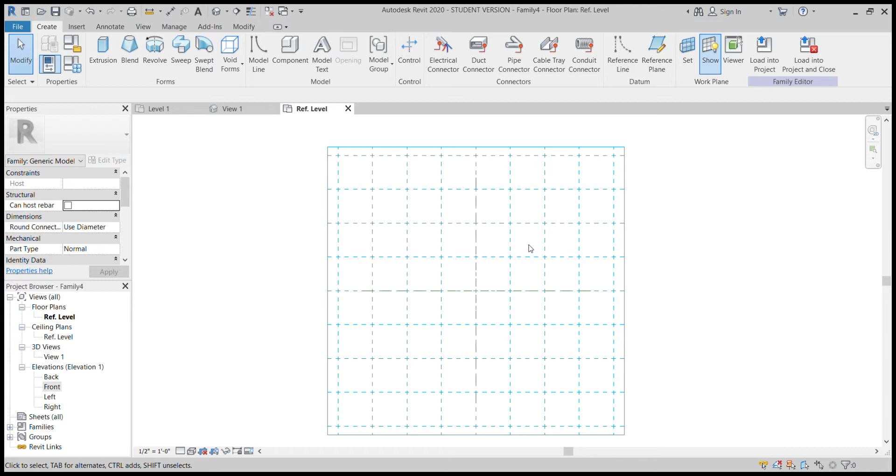Starting off, we're in our family edit mode and we have our reference plane that we're looking at. We then select the swept blend, and just like with the sweep - if you haven't watched the video for the sweep and for the blend, you might want to go check those out first - it gives us the option to sketch our path. So we'll start with that.

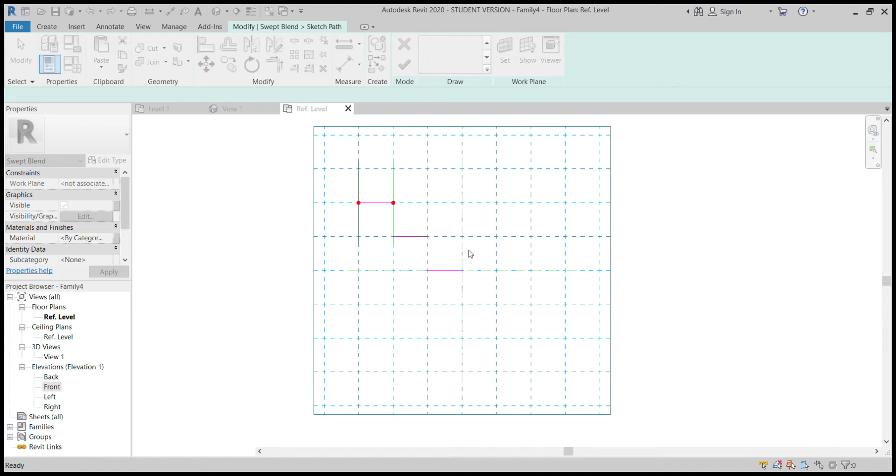And this one, we can't do the stairs that we did before. If we try, it yells at us saying that there's more than one curve and that's not allowed. So we quit that idea, and what we're going to do is a sketch, but we can use this spline tool to create a curving sweeping motion.

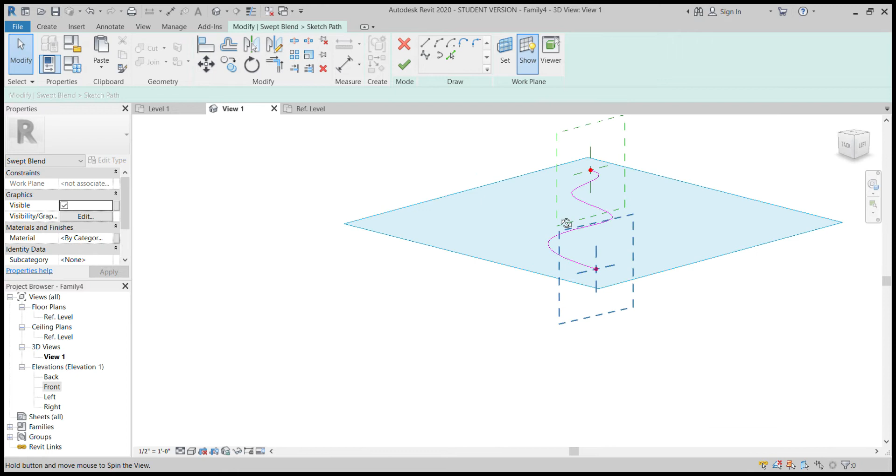The reason why is that when we click OK, looking at it, if we go to our 3D view, you see that we have our two planes rather than just one. That's because our top and our bottom are going to go at each one of them, and it can't have it where it goes straight and then has this extra line. It needs to be able to be smooth, so one end has each.

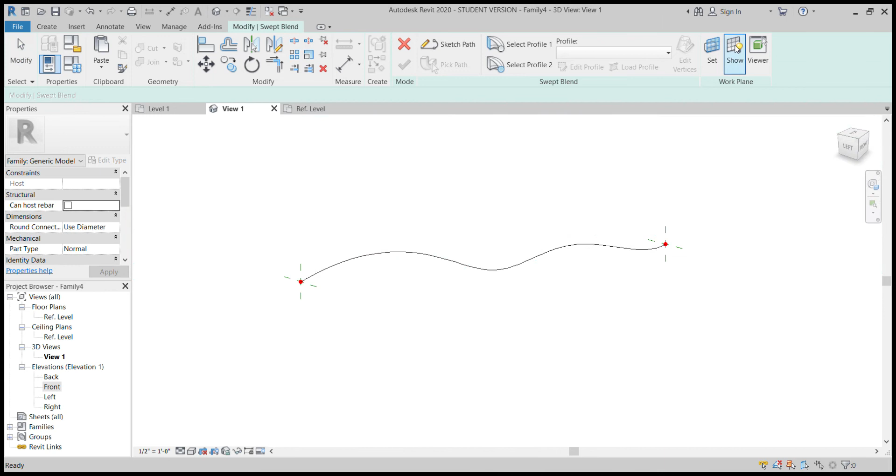So with this, we then OK it, and we can look at it and say, okay, so we have these two sides with this line that's going to follow. So let's select Profile 1, and we want to show our reference point. So we select Profile 1, and we're going to edit the profile.

And we see this is Profile 1, this is the side. So we square ourselves off with this, and we'll just use the same thing we did before, where we'll take a circle, and we'll go about 7 inches out, and we'll just say OK with that one.

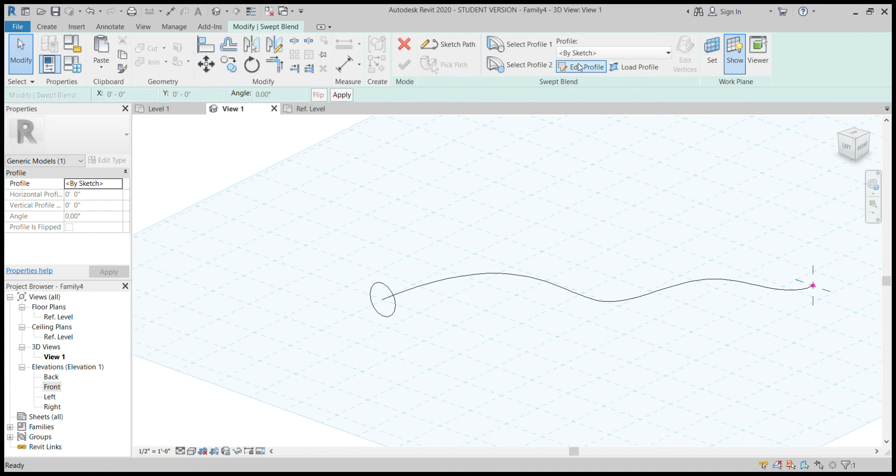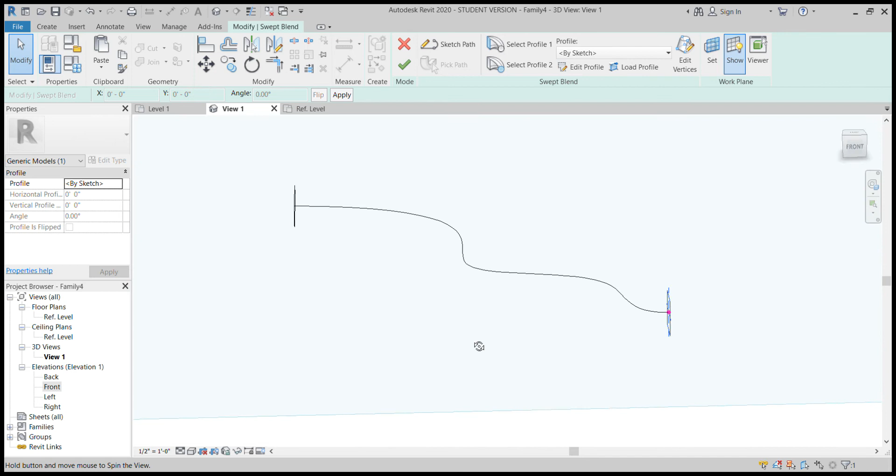So then we want to select Profile 2, and let's pick to edit the profile, which now we're on this side. So we turn around, find the side, square off with it, and this time let's use a square. Let's just go on the one that seems about squared off completely, and then we'll hit edit. So when we look at this, we see, okay, we have a square on that end, a circle on this end, and it's going to follow this path, to which we then click OK.

And we can now see, and let's hide our plane, so we see our circle that transitions into the square on this end. And once again, if we double click on it, you can come over and you can click Edit Vertices, and we can change it.

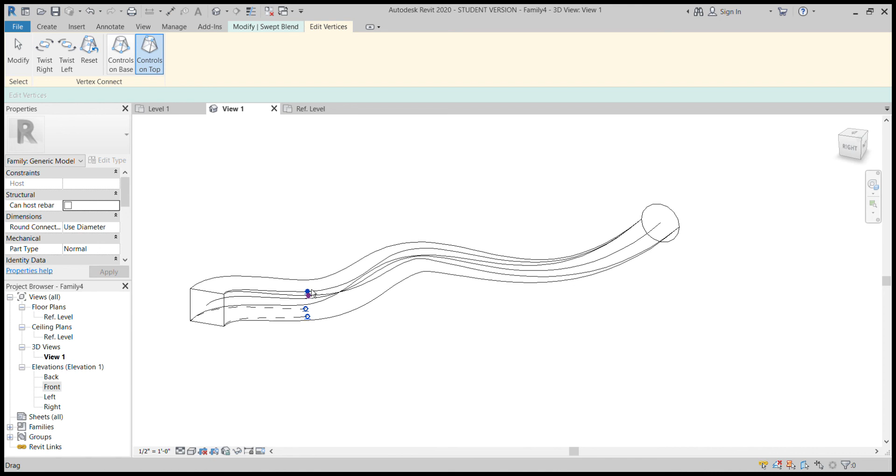We can make them twist in different ways so that we have a slightly more subtle twist where only one side of each is going. And so you can see that you can get quite complicated with it. You can make it very intricate, and it can be kind of fun.

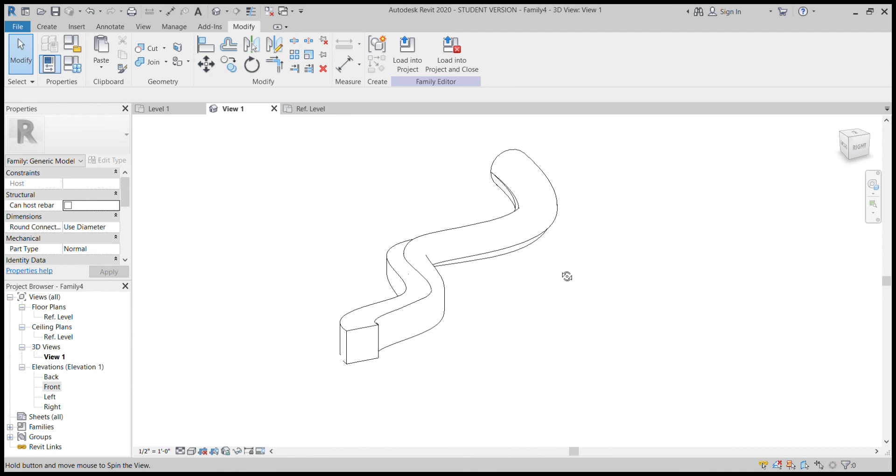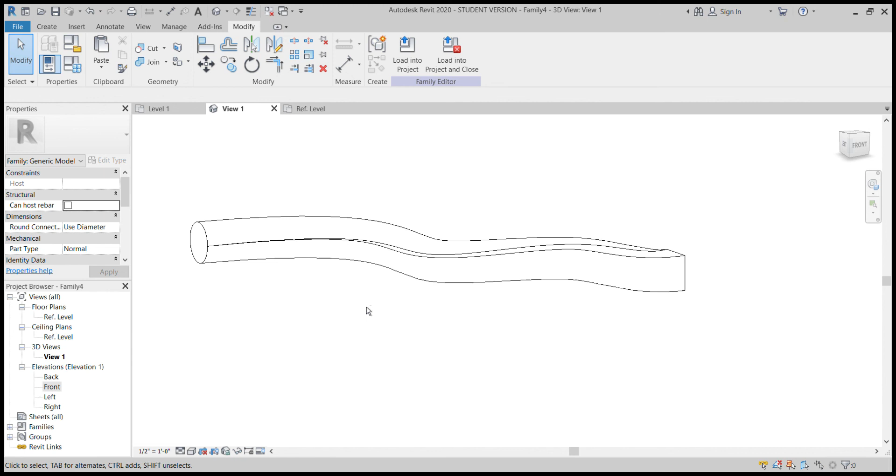You could probably use it for another crown molding if you took the time to make your shapes right. And then you could add interesting twists, giving it a very - I'm not even sure what the word would be for it - I guess just a very complex look that would be incredibly hard to make in real life, but would look very interesting. And that's how you're able to do a swept blend extrusion.